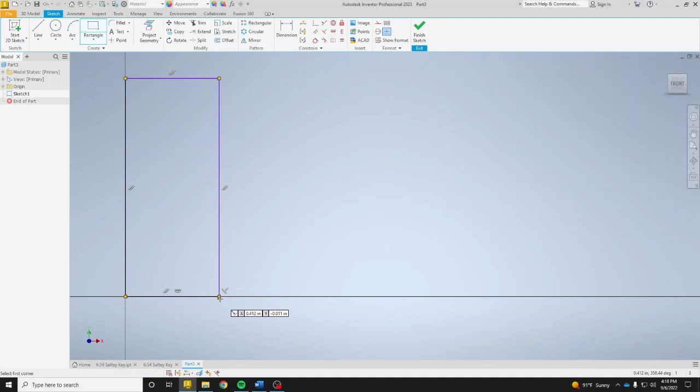Create two rectangles, a vertical rectangle like so, and a horizontal rectangle like so.

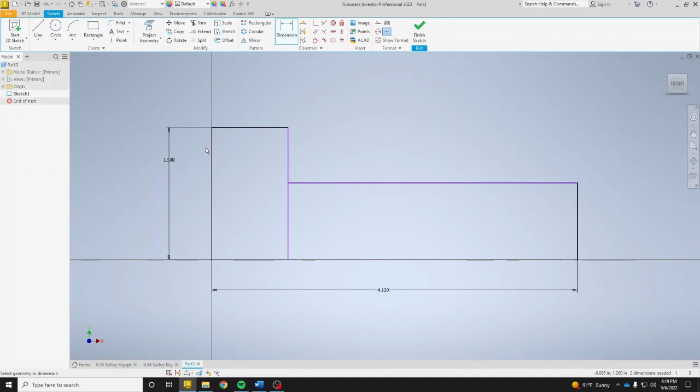Add dimensions. Our overall dimension from left to right is 4.12. Our overall height from top to bottom is 1.5. The width of this rectangle is 0.94, and the height of this rectangle is 0.76.

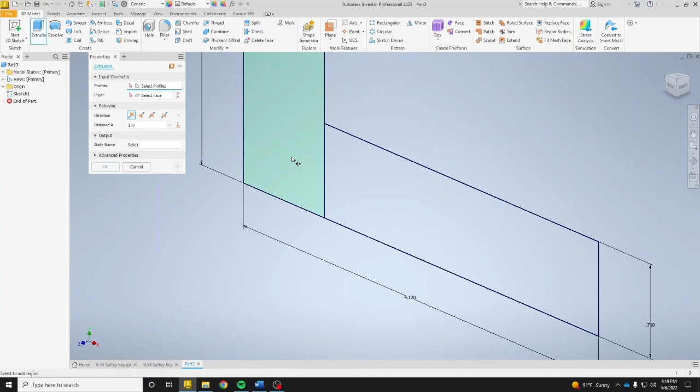Once you have that, go ahead and finish your sketch and extrude both rectangles by 2.3. We're going to be splitting it across the XY plane, so make sure you choose symmetric and say OK.

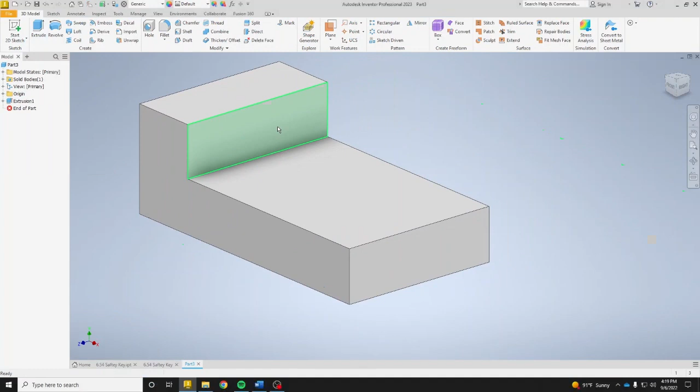The first set of cutouts that we're going to make is going to be on this plane here. We're going to create two triangles, and we are over exaggerating the size of these triangles.

I'm not connecting these triangles to anything just yet because I want to make sure that they're the same size. So I'm going to click on my equals constraint and make sure that this line and this line of the two triangles are the same, this line and this line, and this line and this line.

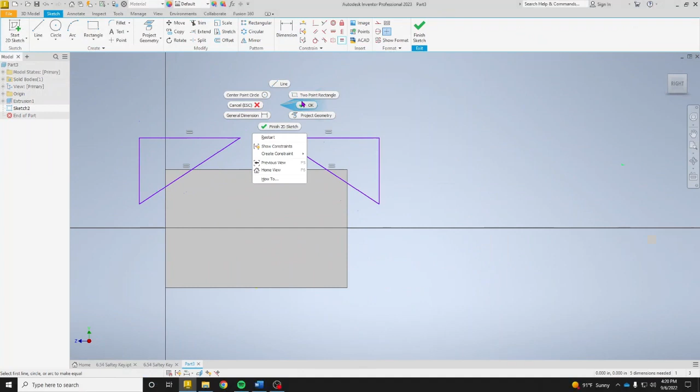Once you have that, then we can click on project geometry and project this rectangle.

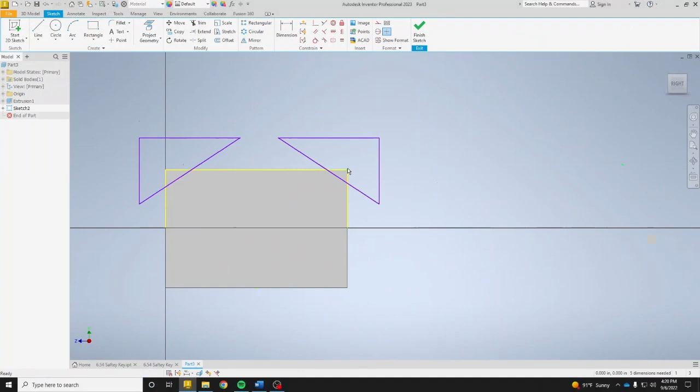Before I move these triangles to connect them here, I'm going to dimension them. The first triangle has a height of 0.44.

And the angle of this triangle is 30.

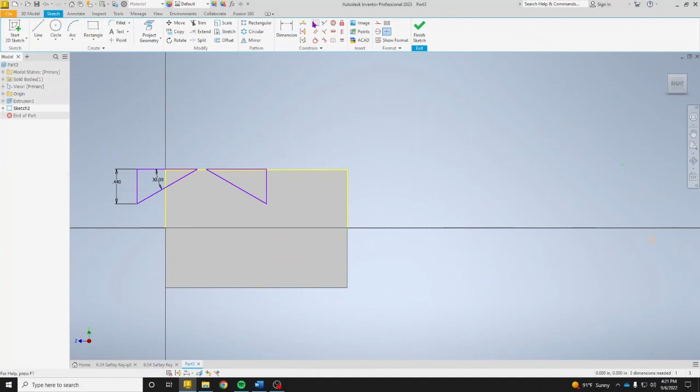Now I can position these triangles correctly. Click on coincident, find the endpoint of this triangle and connect it to this corner, and do the same for this triangle and connect it to this corner.

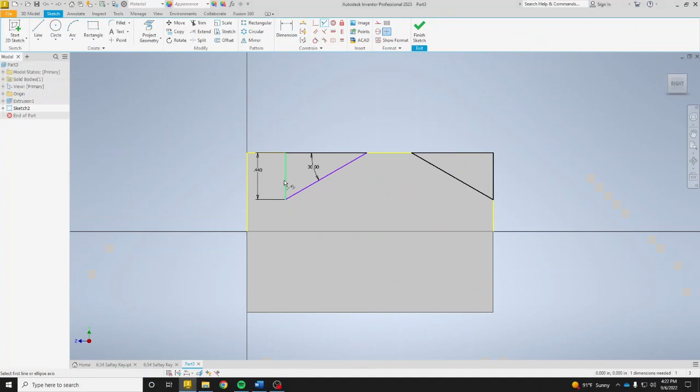On a normal daily basis I would use coincident, but for this I'm also going to use collinear. So I'm going to click on collinear, click this vertical line and this vertical line, and make sure that everything lines up. Once you have those two cutouts or those two triangles, finish your sketch and extrude.

Finish your sketch and extrude. Select both triangles and make sure that you are cutting.

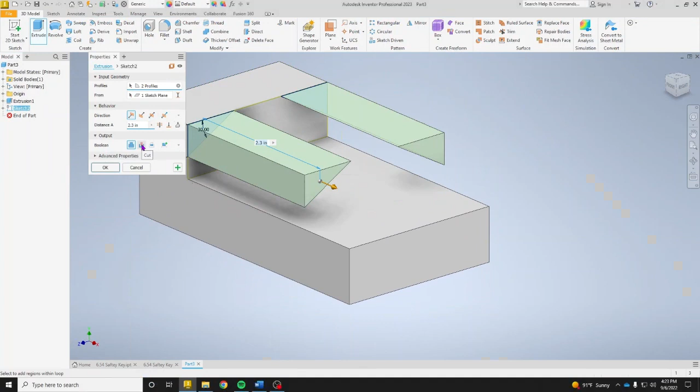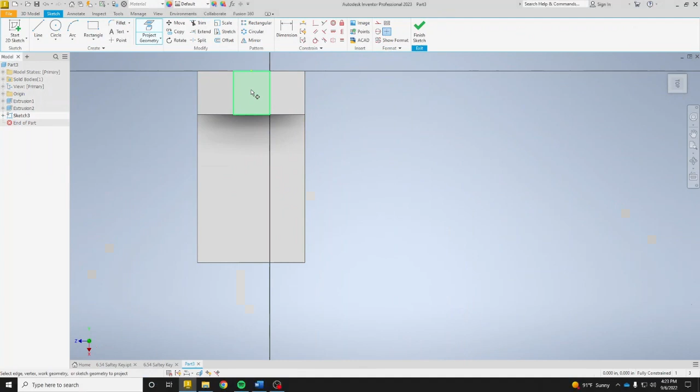Next, we're going to click on this face and create a sketch. I'm going to highlight two different planes. I'm going to project the geometry of this face and this face.

I'm going to combine multiple cutouts into this one drawing. The first set of cutouts are going to be rectangular cutouts here and a rectangular cutout here.

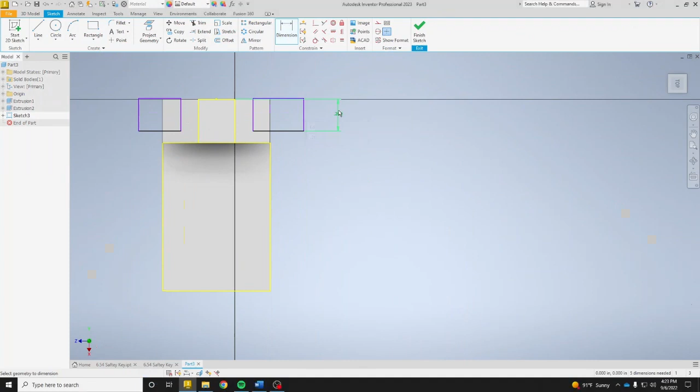Let's go ahead and dimension these to be 0.26 and 0.4.

It may look odd right here, but it might become clearer after we extrude it.

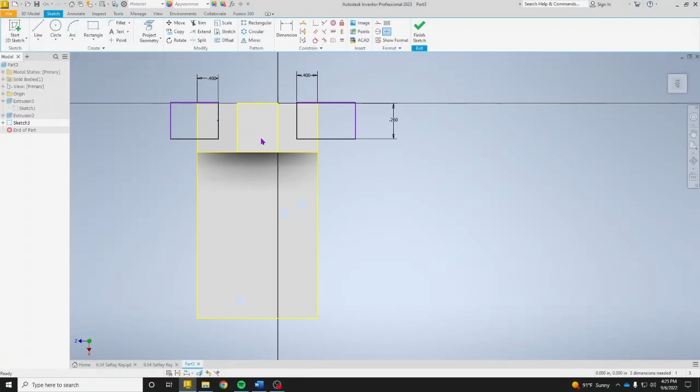Our next cutout are going to be over-exaggerated triangles that I'm drawing here on the right and the left-hand side of this part.

Make sure that you click on the equals constraint to make this line and this line equal with each other, and this line equal with each other.

Now let's add some dimensions. The first dimension we add is this one, which should be 0.30, and the depth or the length of this is 1.9.

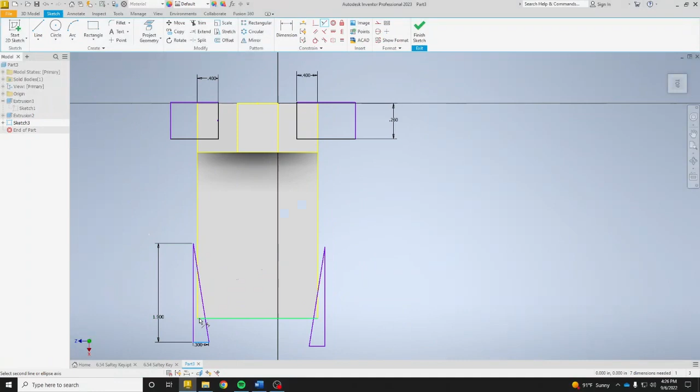I'm then going to use my collinear constraint to lock in this line with this line, and this line with this line, and then move my triangle into location. Once you have that, go ahead and finish your sketch.

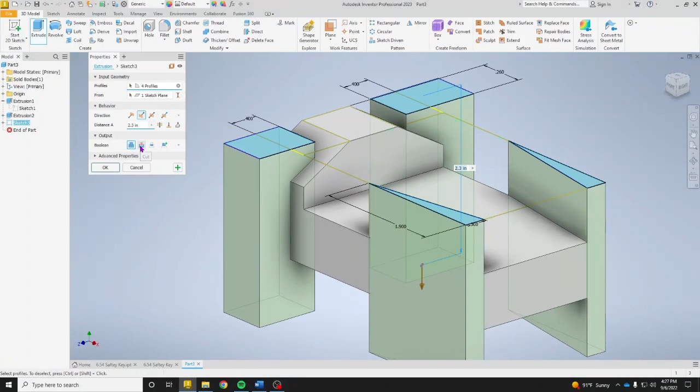Click on extrude and select all of the shapes that we created, and then make sure that we are cutting all the way through. And say OK.

This looks odd, and I don't know why. I have looked at our dimensions, and everything seems to be correct, but it looks incorrect.

That said 0.26 right now. That's what it should read. That's how it should look. So make sure that you guys correct it.

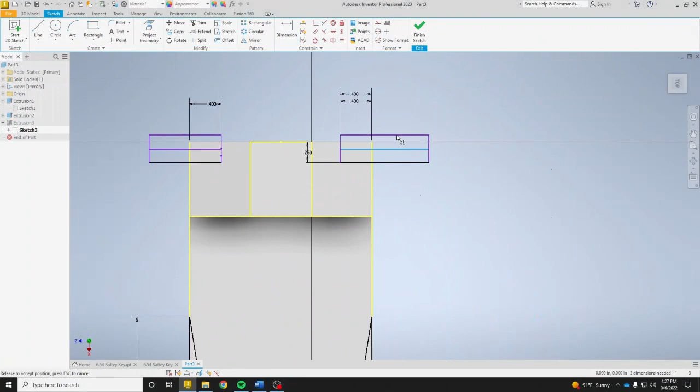And when it extrudes, it should look something like this.

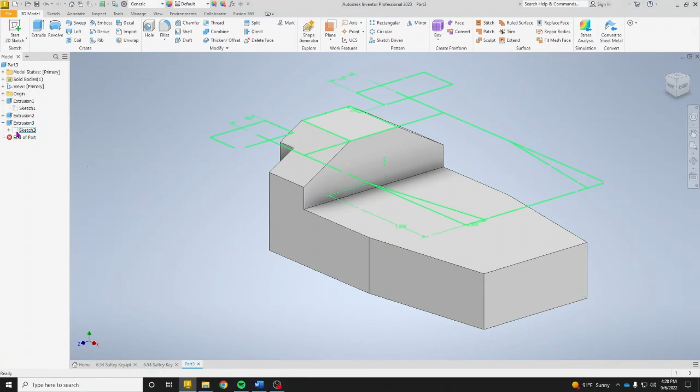I did forget to create our slotted cutout, and I can do that. I can add it by clicking on the plus sign next to extrusion 3 and then double clicking on the icon for sketch 3.

I'm going to switch over to a rectangle, but click on the pull down menu and go slot center to center, and again I'm going to over exaggerate the size of this slot.

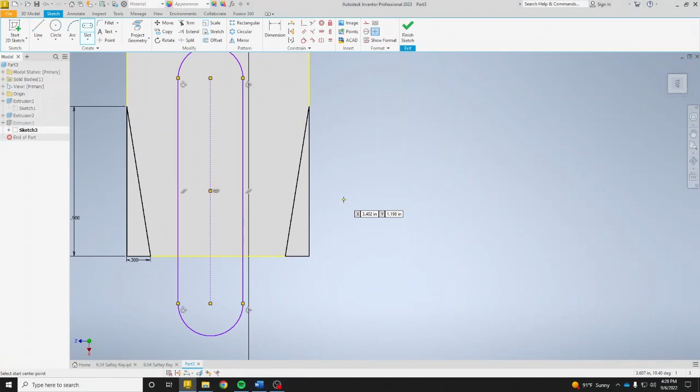This center point here to here should be 1.12, and the width of my slot should be 0.78.

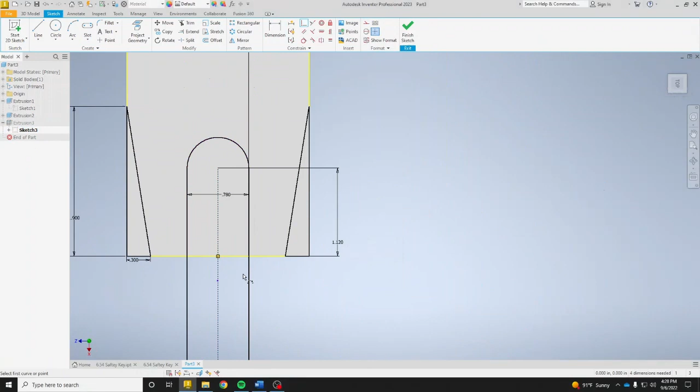I need to make sure that the line or the center point is coincident with the center point here. Once you have that, finish your sketch.

Nothing happens, but if you double click on extrusion 3 and then select it, it then gets cut out.

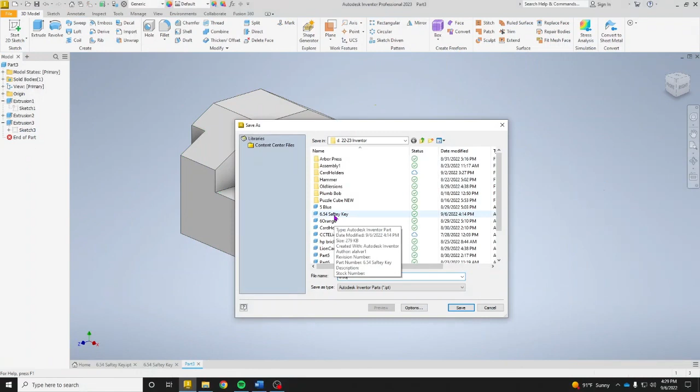Go ahead and save this as 6.55 finger guide.

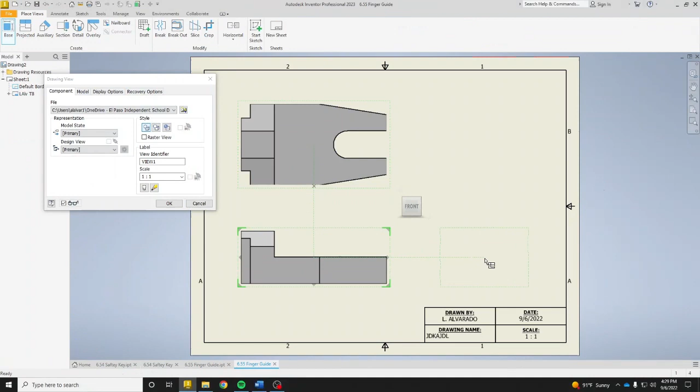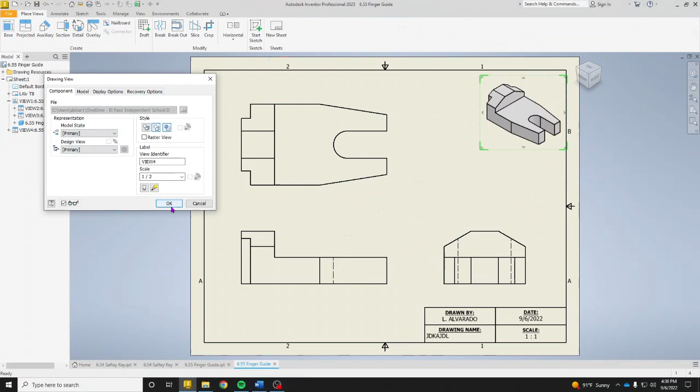We then need to put it on our title block to have a front view, a top view, as well as a side view, and also an isometric view. Say OK, and as you can see, the isometric view is too large, so let's double click on it, scale it down, and make sure that it is shaded, and there you go.

Remember that you need to add center lines, so I'm going to click on center mark and then click on this arc right there, and then add a centerline bisector here and here. I should also add one here, but there is no other line to bisect, so I'm going to leave it off.

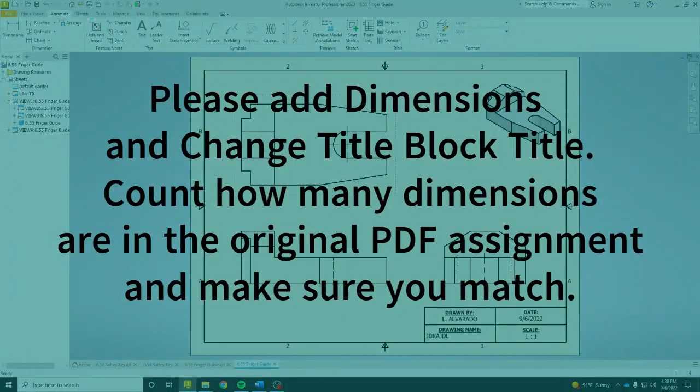It is now your responsibility to add the missing dimensions as well as changing the drawing name. If you guys have any questions, please let me know, and I'll see you guys in the next video.